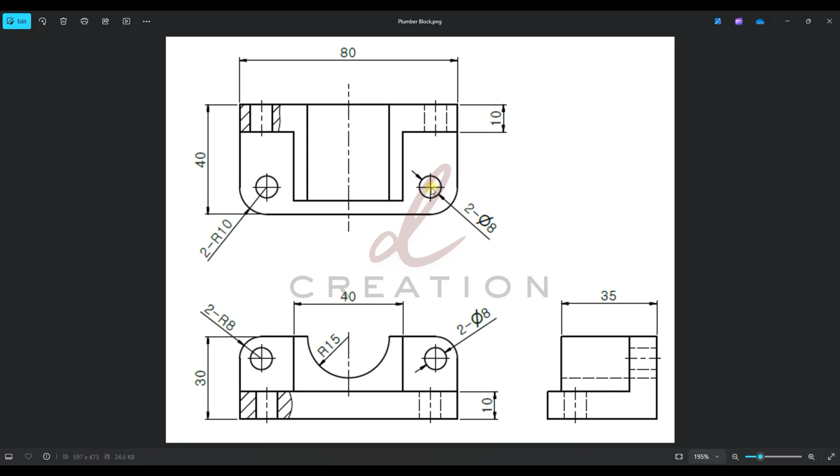Analyzing the drawing, we can see that this hole has no dimension, which means it's fit with the fillet center points. So fillet center points are really important to draw the holes. And now we can start the drawing. So we start with the top plane.

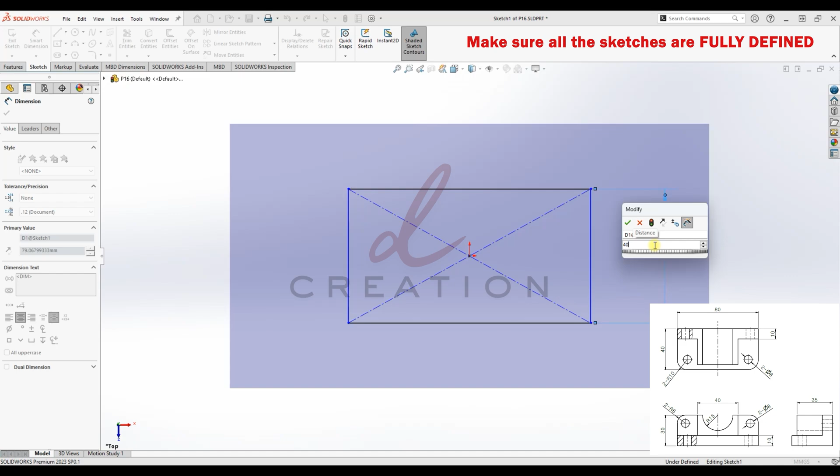So we're going to do a new sketch, and then we're going to click on center rectangle and make sure the center is from the origin, and apply the dimension of 40 to the width and 80 to the length. So you can see that the line color is completely black. If you see any other blue color, the sketch is not defined, and you can see whether it's defined or not over here.

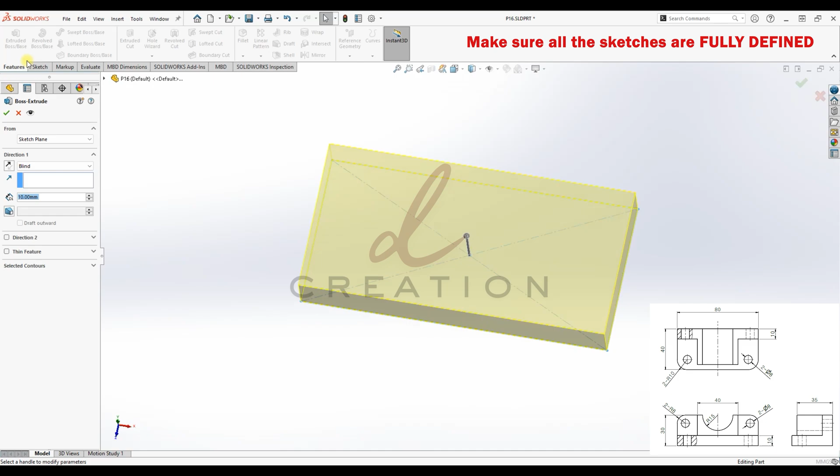And then exit sketch, we use the extruded boss/base feature, and we need to extrude base until 10 mm. And don't forget, before you start the sketching or designing a product, you need to make sure it's in the right unit. Today we are going to use millimeter gram second unit. Okay, back to the work.

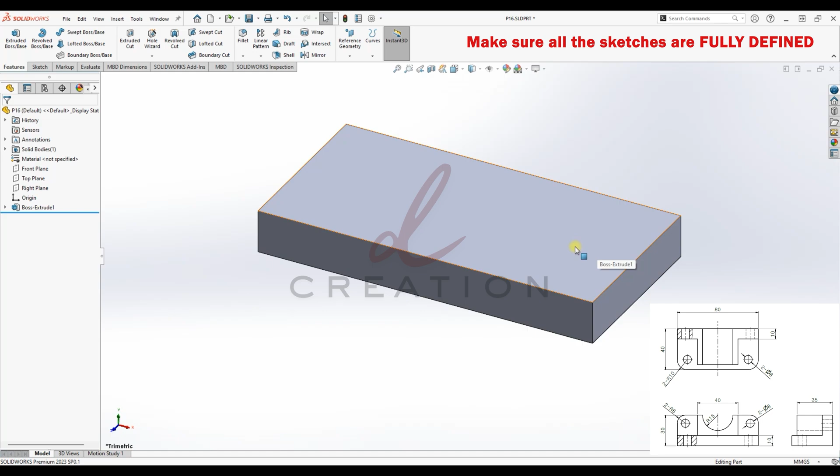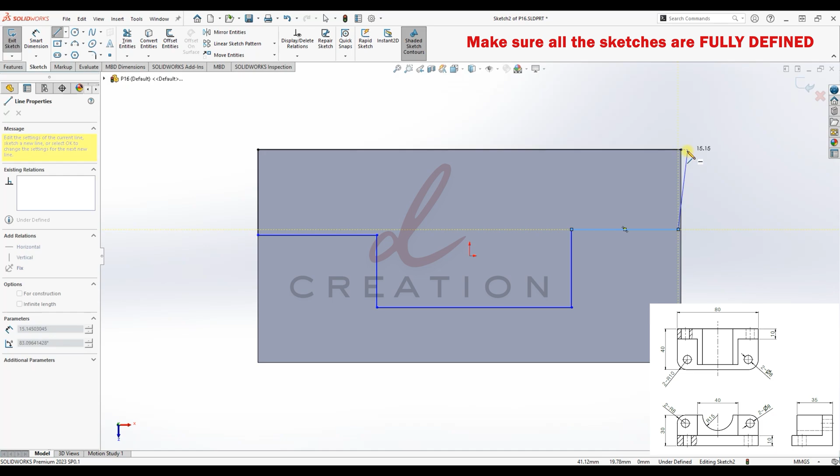We already created the base. For the next part, we need to select the top face of the base, click new sketch, and then using the line feature, you follow the base line and create a sketch that looks accurately like the detail drawing. The detail drawing will be shown at the bottom right corner, so you can refer to the drawing.

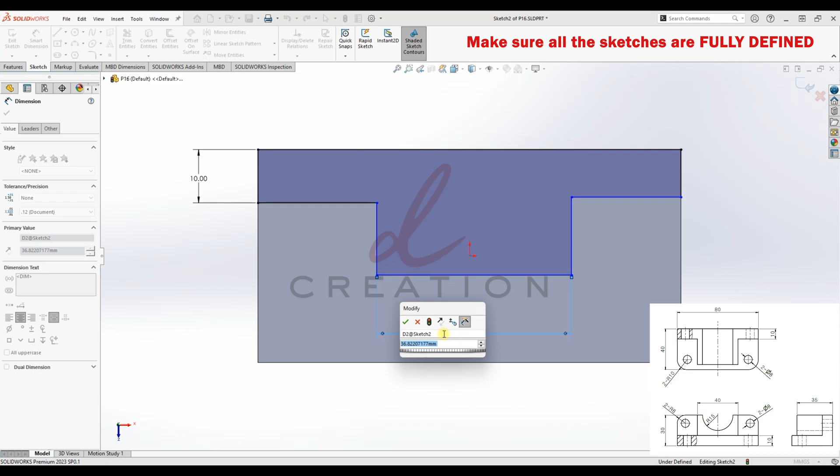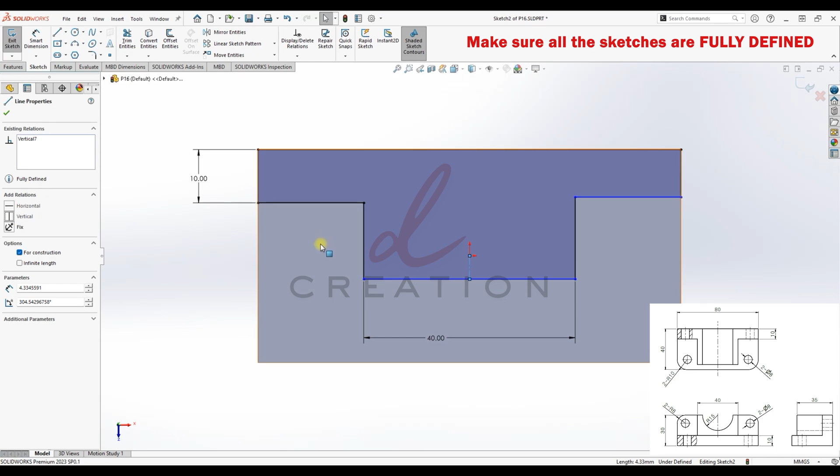Here the width of this line is 10 and length of this is 40, and we need to make sure that this line and this line are symmetrical with the center. So we click a center line and find to meet at the midpoint of the line, and then click the center line and make it vertical, so that automatically the line will be symmetrical to the center point.

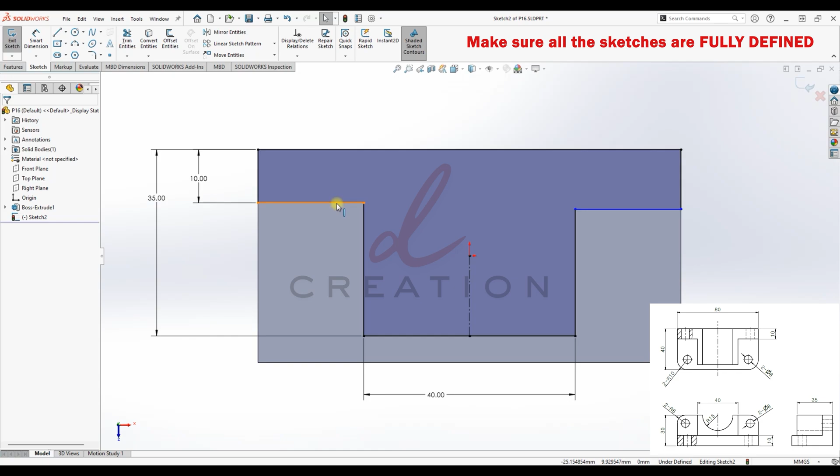And then here we can see that this line is movable and this line also is movable, so we need to define the dimension. So the dimension will be 35 for this line as the width, and to make sure this line is parallel with this line, click any point of the line, hold your control key and then click the opposite point, and then make it horizontal. It automatically will be parallel to the opposite line.

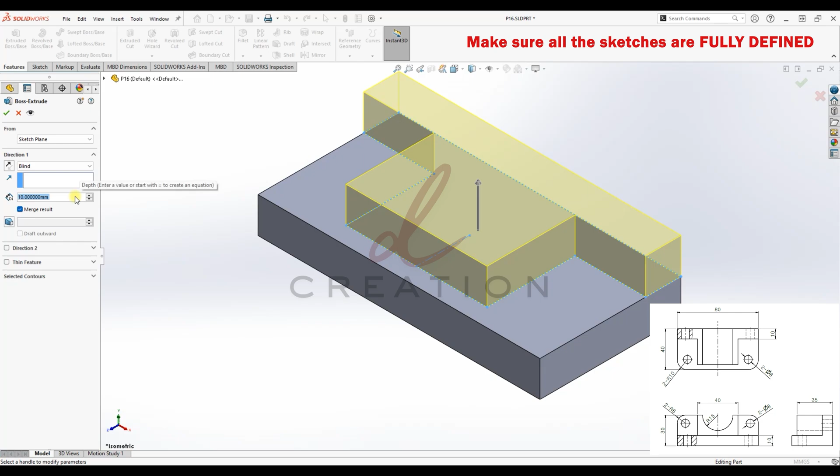Now our sketch is fully defined, so exit the sketch, put it in isometric view, and then extrude. Here we need to extrude until 20, because according to the detail dimension from the top to bottom is 30. We already extruded the base until 10, we have the balance 20.

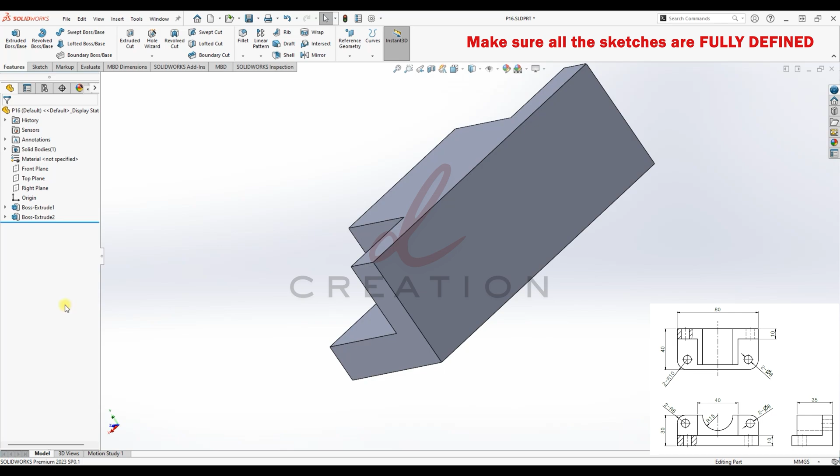Okay, so here we get the plummer block view. Now we are going to extrude cut the semicircle, so I'm going to select this face, click and create a new sketch. I'm going to use the circle feature and create a circle. So we can see that the circle dimension is 30, which means the radius is 15.

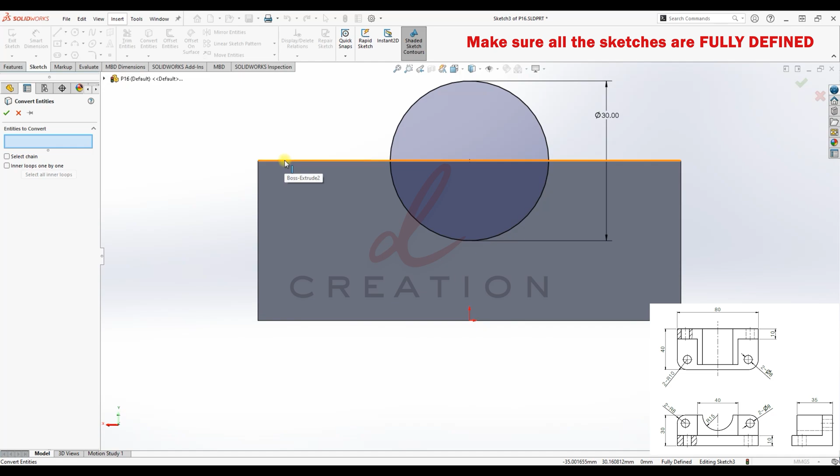Then we can use the convert entities feature to copy the line and make it into this sketch. So click on convert entity and then click on this line and click OK. So you can see that from another sketch we can convert the entities into our new sketch.

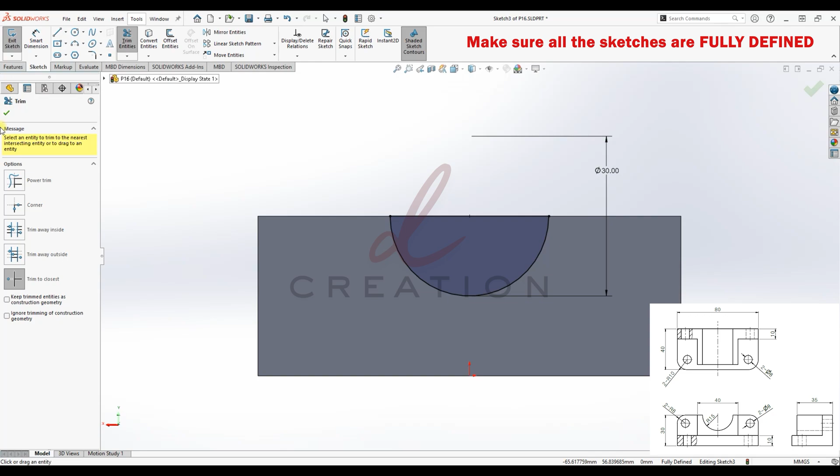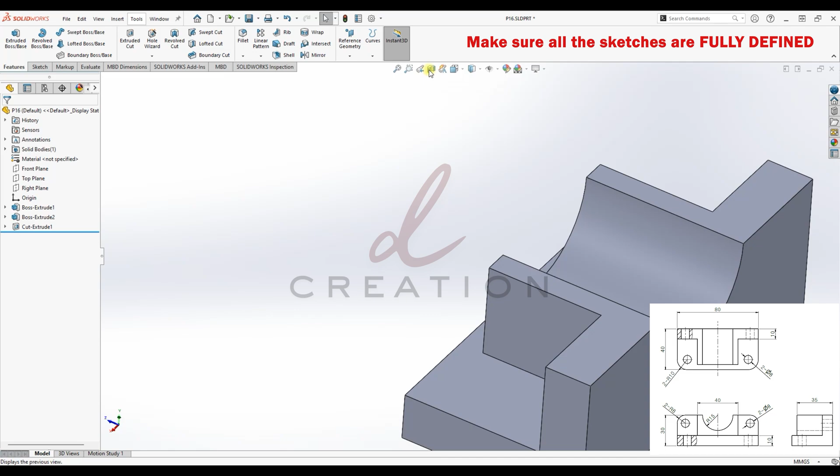I'm going to use the trim entities feature to cut the unwanted lines. So now we have the semicircle on this plane, so we are going to extrude cut until here. We exit the sketch, we click on extrude cut. You can select through all, or you can select up to surface and click on the surface that needs to be cut, and then cut. So we now have the extrude cut semicircle over here.

So we are going to do fillet now. According to the detail drawing, the fillet here is radius 8 and the fillet here is radius 10. So we are going to use features fillet, and then select the edges. Before selecting the edges, make sure you fix the radius value. Now it's 10, so we are going to choose here and here.

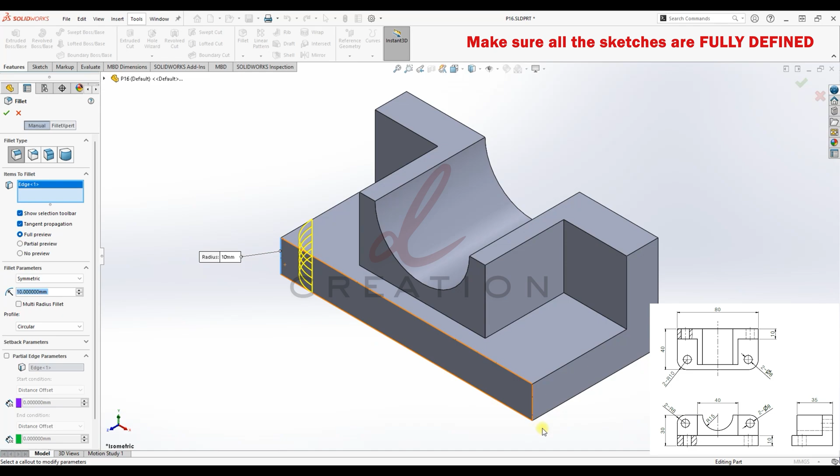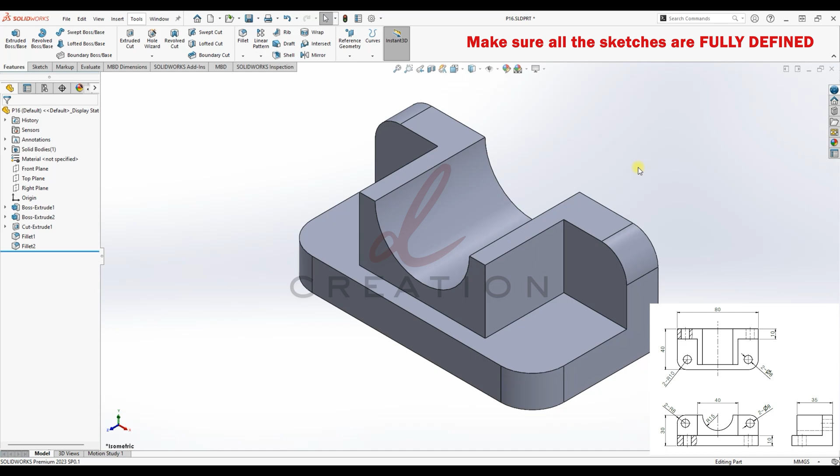You can see the preview of the fillet by clicking full preview and then click OK. So automatically the base edges are filleted. Now click the fillet again, change the value to 8 mm, and then click on the top edges. You can see the preview, click OK. So now we already have the fillet features, and as the last part we need to cut the hole at this face and this face.

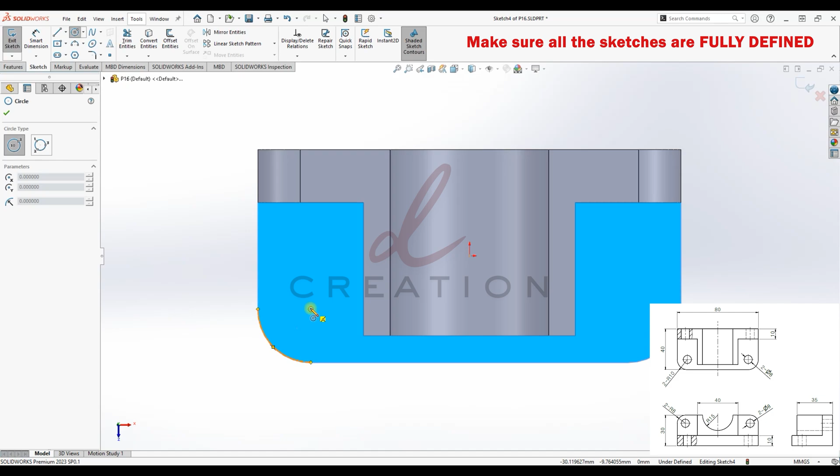So we click on this face and create a new sketch, click on the circle and bring your pointer to the fillet edges, so you can see the center point of the fillet is visible. Click on the center point and drag it. Okay, and give the dimension of 10 mm as a diameter.

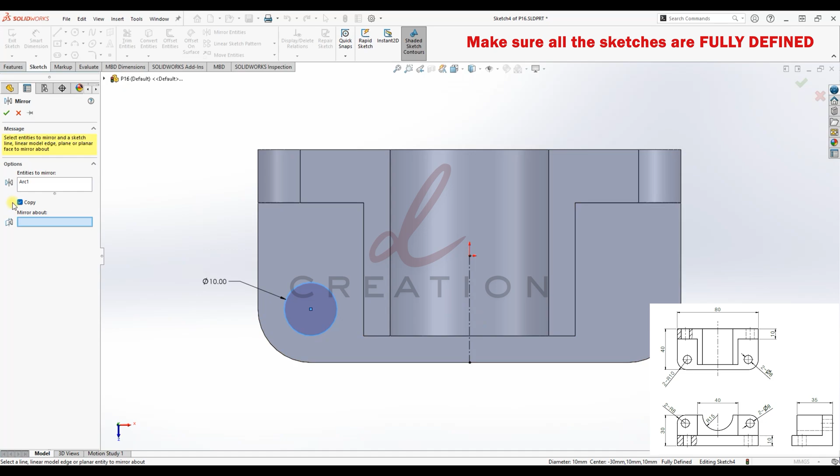Since this circle is at the opposite position over here, we can use the mirror entity. Before that, we need to draw a center line from the origin, and then click mirror entities and select the object that needs to be mirrored, and here the line the object needs to be mirrored from, and click OK. So this mirror object will follow every data from the original object.

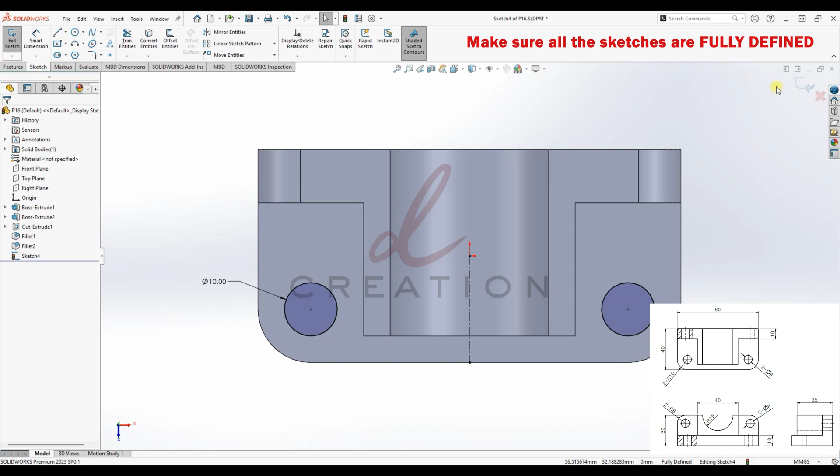So if you change the circle diameter to 8, automatically the opposite object also changes. So let's change it back to 10. Alright, exit sketch, extrude cut. Now you can use through all. Alright, so the same method we are going to use over here.

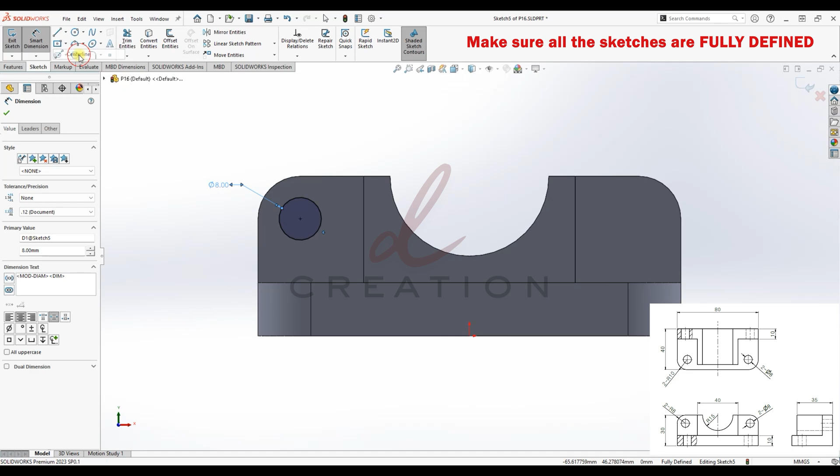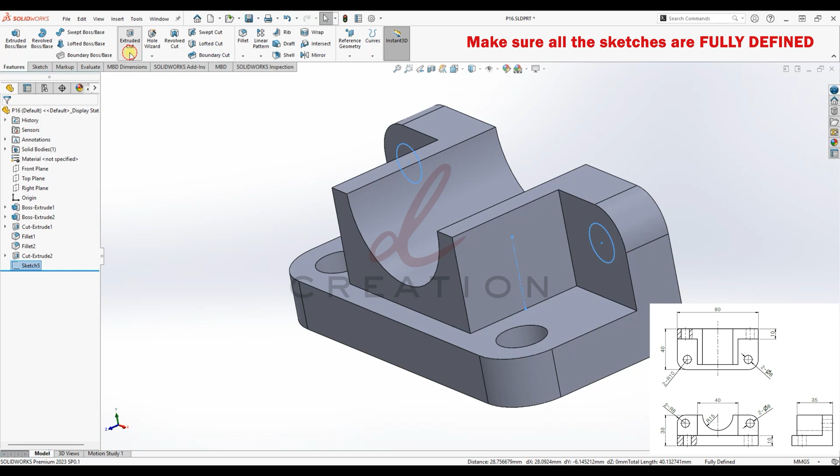Click on circle, put the pointer on the edges, click on the center point of the fillet, apply dimension for the circle 8 mm, and then using the center line from the origin, we use mirror entities, select the object that needs to be mirrored, select the line, and then click OK. So we have the sketch for this side. Exit sketch, extrude cut using the through all feature.

And yes, we have completed the object. So you can compare with the detailed drawing. Here is the plummer block.